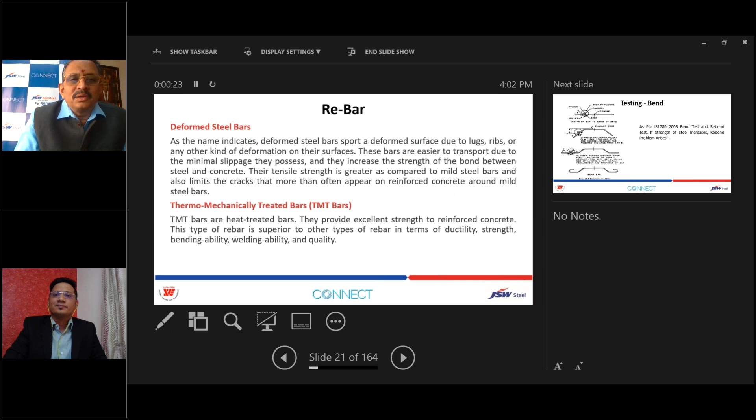Good afternoon, and thank you Omkar for the good words about my introduction. It's my privilege today to share some knowledge and thoughts about this very good topic selected for the audience, particularly the engineers and practicing engineers. It has been in my mind—there are many questions for me also regarding the use of higher grade rebars, which we have been using and trying to find solutions for. So today I'm going to share whatever solutions we found for the use of higher grade rebars, the issues we are facing, and how in the future this material is going to go higher and higher in grades. Welcome, all participants. I'm very happy to share this presentation today, and I hope it will be useful for you all.

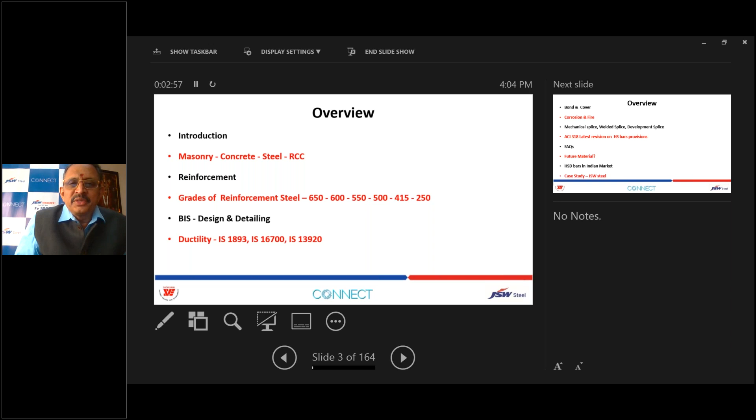So, higher grade rebar, the material of the future, is the topic of today's discussion. My presentation overview: a brief introduction, then masonry, concrete, steel and RCC, and how these have transformed structural systems. Then reinforcement, the primary topic of the day—the rebar or reinforcement steel—and the grades of reinforcement steel, how they have grown starting from 250 about 3-4 decades back. Then Bureau of Indian Standards provisions for design and detailing, how we have to utilize these provisions in our design, and the ductility provisions. Seismic design is now very important for all structures in India, so I'll briefly touch on the ductility provisions of IS 1893, high-rise structures and tall buildings up to 250 meters as per IS 16700, and also ductility detailing as per IS 13920. So these are the topics.

When we talk about higher grade steel, immediate questions pop up in our mind. What about bond for higher grade steel? Will it be okay to use the same M20 grade concrete with higher grade steel, or should we increase the grade of concrete also? Similarly, the cover to reinforcement—will it require a higher cover? These are all questions. How about corrosion when we go for higher grade steel? How about fire resistance? And then the immediate thing when we talk about higher grade is mechanical splices—can we use couplers? Can we do welding for the splice? Can we use the same development length, or should we calculate a different development length? Is there an increasing factor to increase the development length for higher grade steels because of bond considerations?

While preparing for this presentation, I found that the IS 456 provisions, which are currently under revision, do not adequately cover higher grade reinforcement—whether in special publications SP24 or SP34 detailing provisions. All this needs definite upgradation. So I found that ACI 318's latest revision, 2019, has adequate provisions covering all the HS bars detailing and design provisions. So we must all, as engineers, refer to this ACI, and also ASTM for testing.

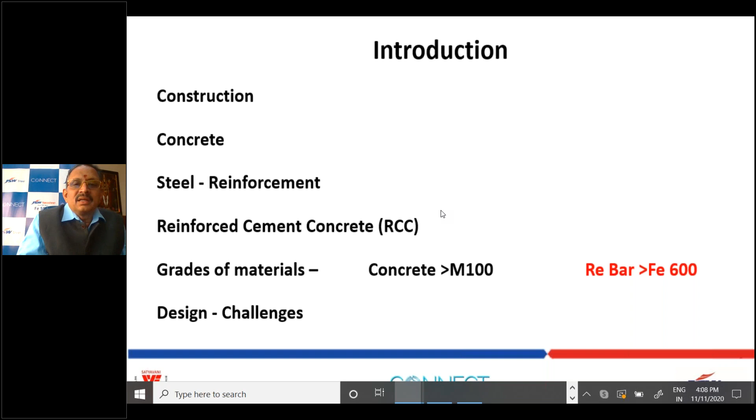In construction, the role of reinforced concrete and steel reinforcement plays a very great role. In this pandemic and lockdown period, we are seeing a lot of lectures on concrete, as everybody thinks concrete is a complex material. I have given many lectures on concrete, precast and steel on pre-engineered buildings, but reinforcement as a material, as a specialized talk, this is the first time I'm talking about it. To my surprise, I found there is a lot we have to cover, so please stay aligned with me to get this information I'll be sharing today.

Reinforced cement concrete is the most versatile material for structural elements, spread uniformly worldwide with the widest applications. Concrete itself is the second most used material after water, but concrete cannot go alone, it needs reinforcement. Today we are seeing the grade of concrete going above M100, and the grade of steel going above 600. We have to be abreast with information about codal provisions, design and detailing provisions, and the challenges in design, construction and quality control. This is the brief introduction to our topic today.

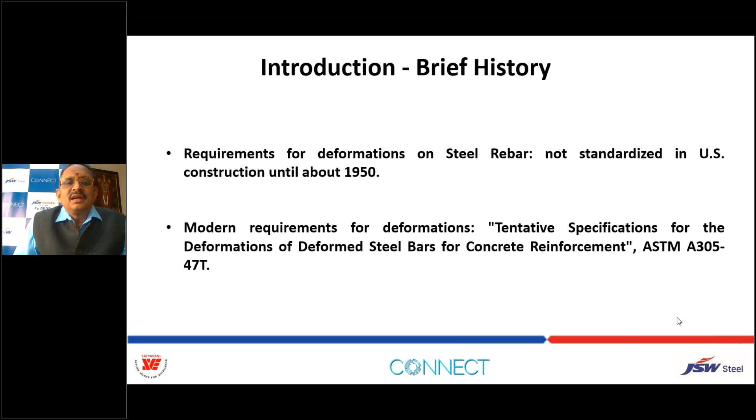The requirement of deformations on steel rebar - reinforcement bars in masonry construction were first used about 600 years back, so we can all feel confident that the concept of reinforcement per se is time tested.

During the 18th century, rebar was used to form the carcass of the Leaning Tower of Nevyansk in Russia. The cast iron used for the rebar was of high quality, and there is no corrosion on the bars till date, meaning more than 200 years. Europe and North America developed proper reinforced concrete in the 1850s, and the longest standing reinforced cement concrete high-rise building is about 113 years old now. So around the mid-19th century, rebars were used in producing modern reinforced concrete.

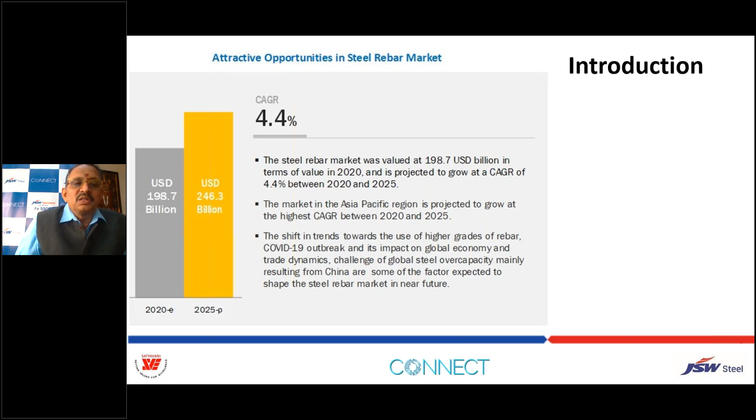The business of reinforcement is about $250 billion, projected by 2025. Now it is about $200 billion, and out of this 246 billion, the Asia Pacific consumes the maximum reinforcement, doing the maximum business. We are all in the Asian region and Indian subcontinent, one of the fastest growing regions, and it is very important for all of us to be clear about the grades and quality of this material and how we use it.

Structures started with masonry, structures we see that are 2,000 to 5,000 years old. Then came concrete, then reinforced masonry, then steel structures. Today reinforced concrete has become very common, used everywhere in rural, urban, developed and underdeveloped areas. Next is pre-stress, which has gone beyond reinforcement, and composite materials. Now we are talking about high-grade materials, upgrading reinforced cement concrete.

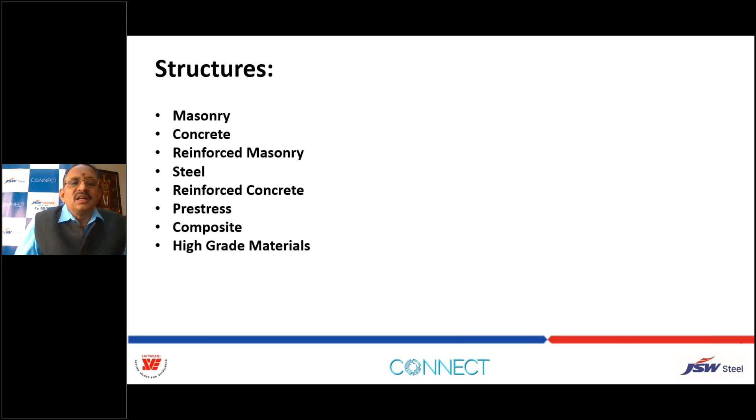Earlier we were only using M15 grade concrete and Fe415 for almost 2-3 decades. Now is the time to upgrade our materials and our design data with these higher grade materials. Let us refresh our thoughts on this reinforcing material: concrete is weak in tension and has to be reinforced properly with suitable material. The purpose of providing reinforcement is to take up all tensile stresses, increase the strength of concrete sections, and prevent the propagation of cracks developed due to temperature and shrinkage.

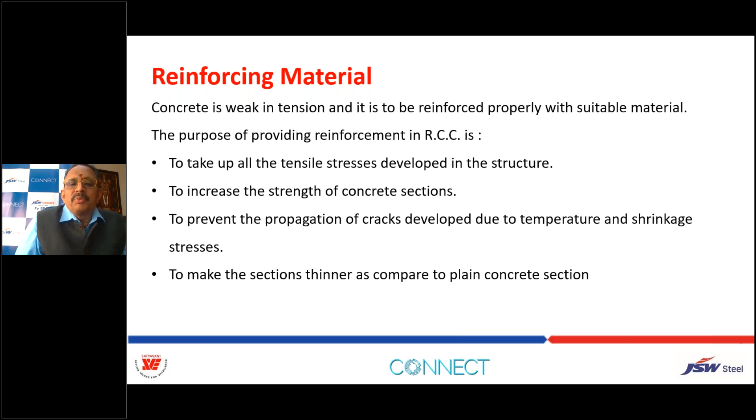So we provide the reinforcement not only for the tensile stress, but also to restrict the crack propagation due to temperature and shrinkage stresses, and to make the sections thinner as compared to plain concrete sections. So these are all the reasons for reinforcing, and criteria is it should be having perfect bond with the concrete.

That is the most important thing, as we all know. Steel reinforcement should develop the bond, otherwise, because these two are different materials, we can't utilize the tensile capacity of the steel without this bond capacity. So that is one of the most important criteria.

And next is it should be of high tensile strength, because we are trying to compensate the weakness of concrete in tension. And cost should be reasonable, because many people ask me, students particularly, why not aluminum, why not other metals which also have higher tensile capacity, even the carbon fiber. So the reasonable cost is the basis for steel being an optimum material satisfying all these requirements.

The next most important point is coefficient of thermal expansion, which is reasonably in tune with that of concrete, because when there is a temperature change, if these two materials have different coefficients, then it loses its bond connection. So it should be workable.

Next most important thing, we should be able to cut it, bend it, and join it, because we should be able to fabricate. Concrete has become so popular only because of its flexibility. Same way rebar with steel also has become popular only because of its ease in cutting, bending, and joining. We are trying to further improve this as we move forward. We'll discuss all those points.

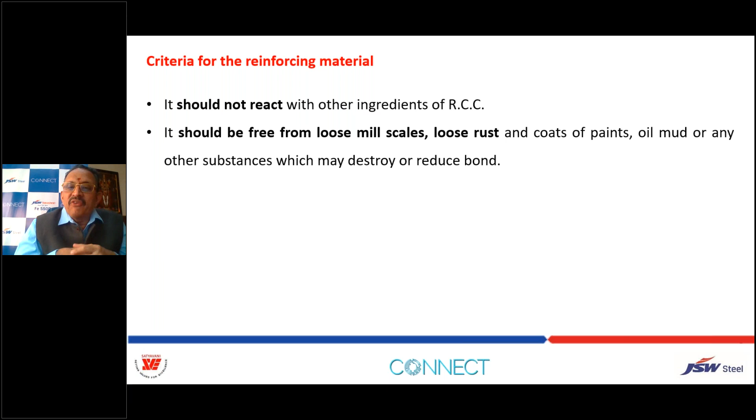And it should not react with other ingredients of concrete. That is mainly the corrosion. Either it should not affect the concrete, or it should not be affected by the concrete. It should be free from loose mill scales, loose rust that forms during manufacturing. So that is one of the important criteria.

So that's how we have got this steel reinforcement or rebar, or Tor steel, or Tarkari and HSD bars today. Tarkari was a brand which I used in 1990, which had come up with 550 grade those days itself. And I can't forget it, because I also want to share that experience with you, because many people at the time I completed my design and drawing with Fe 415.

And then my client came up with this Tarkari saying that it is having very high strength, almost 30% more strength compared to what I had already designed. So please modify the drawing. It was such a huge work, and you know, structural engineers are paid very paltry fee.

And I thought that I must do it efficiently. So what I did is I applied a 1.3 factor and reduced the steel reinforcement. In the process, I ignored certain detailing criteria and minimum percentage of steel criteria and issued the drawing. And also, almost, construction started.

And so what I'm trying to say is, please don't use such methods. We have to inform the client, when you are saving the cost, you compensate us for the extra work also. So use of higher grade materials, if we have to do, convert the drawings, convert the designs, we have to spend again right from the scratch. That's what from the design table and detailing table.

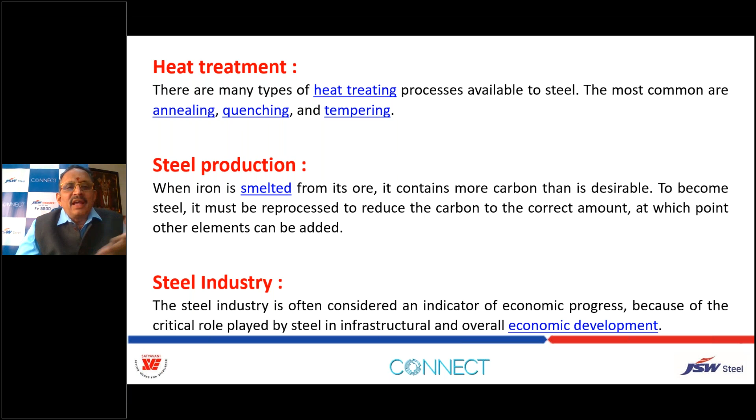And higher grade helps us in saving costs very drastically.

So suitability of steel as reinforcement: we all know steel is very strong in compression, of course with buckling and proper ties, and tension is another capacity. Almost we utilize 87% of its strength as per our design, for shear and torsion too. Concrete develops very good bond with steel, and steel is ductile. That's very important because it never fails suddenly. Steel gives us time to understand the yielding, and we can save lives if it reaches that point. More elongation of steel before failure helps us, that's why we insist on percentage elongation of steel.

Steel bars can be cut, lifted, and welded easily with commonly available tools and hand machines. It has longer life if provided corrosion protection, or we use corrosion resistant steel. It's easily available because in the last 20 years, steel production in India has grown threefold with companies like Jindal, Tata, and others, which was otherwise mainly a public sector. So India has grown from 30 million tons of production capacity in 2000 to 90 million tons. That's a very fast growth.

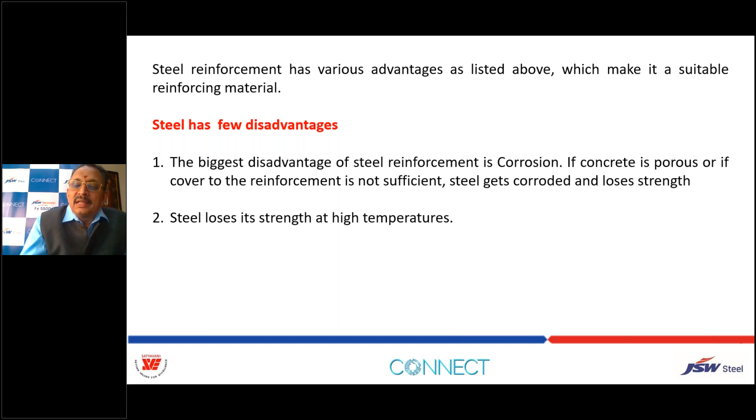We still have to grow much further because we all know housing and office space shortages, and it's going to transform a lot as we move forward. But steel also has two things we have to take care of: corrosion and temperature, that is fire resistance. These two are very important. In fact, I have seen a fire accident in one building where the whole steel is exposed, meaning the whole cover portion has fallen. So adequate cover for fire resistance is very important to protect the steel, particularly when we use high grade steel reinforcement. We have to take care of this, and as we move forward, I'll explain how we can improve the temperature resistance.

Rebar types: we have come across mild steel, and properties where 7850 kg per cubic meter is what we take as unit weight, but it can range between 7750 to 8050. This is the main property. We also have deformed steel bars, TMT bars, which is very popular today, thermomechanically treated bars. We also have high strength deformed bars, that is the actual technical term as per the code.

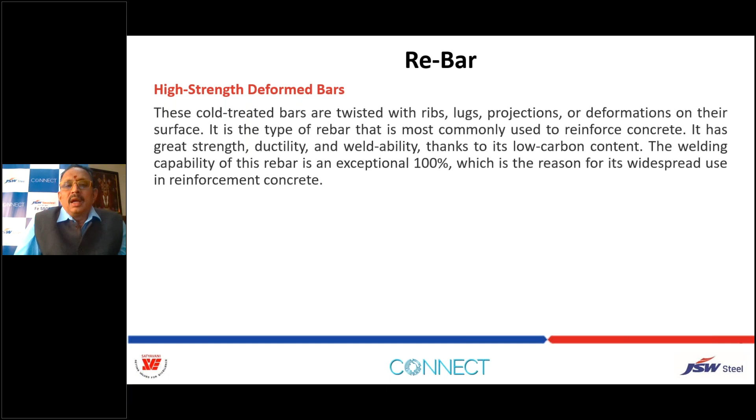Just for academic interest, I'm sharing this—not directly relevant to today, but since we are talking about corrosion, we need to think about this, and also the need and practice of preheating, which is required for weldability, which I'll share more in detail as we move forward.

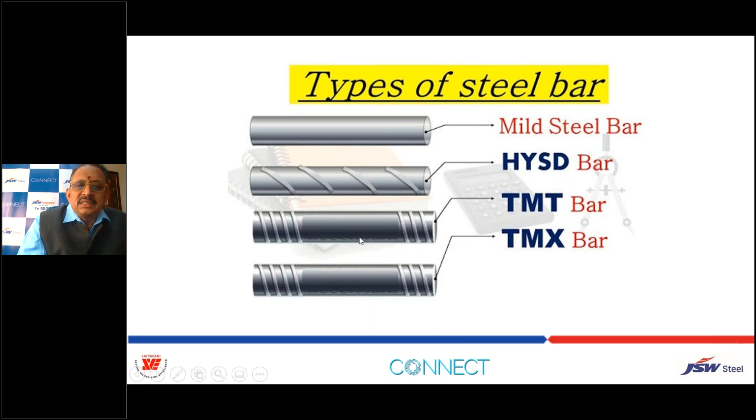Now the types of steel bars: as we all know, HYSD bars used to be twisted, and we used to have ribs like this. Now we have TMT and TMX reinforcement bars, which look like this. This is the rebar that we normally look at. There is a specification for the radius of this junction and the rib size for proper and adequate bond, which we'll be discussing. So these are all the rebars.

Then we use the rebar not in isolation, we all know. There will always be a joint for the rebar, or we'll be using it as a mesh, or in the bent condition. So what are the issues, why should we talk about higher grade at all? What are the issues in the current rebar that we are using, whether it is Fe415 or Fe500?

Let us just refresh again. We all know, as per SP34, we do the detailing—how to place the reinforcement, what is the spacing, what is the diameter, what is the minimum and maximum spacing, and what is the minimum and maximum steel percentage. We have all these provisions covered in IS 456, and also detailing requirements like development length, position of splices, and bent bars, and how to bend these bars, all defined in SP34. I'm not going into detail, just refreshing on these ideas.

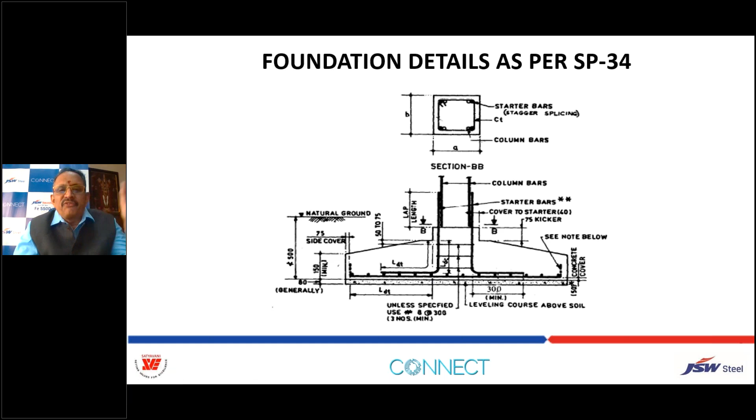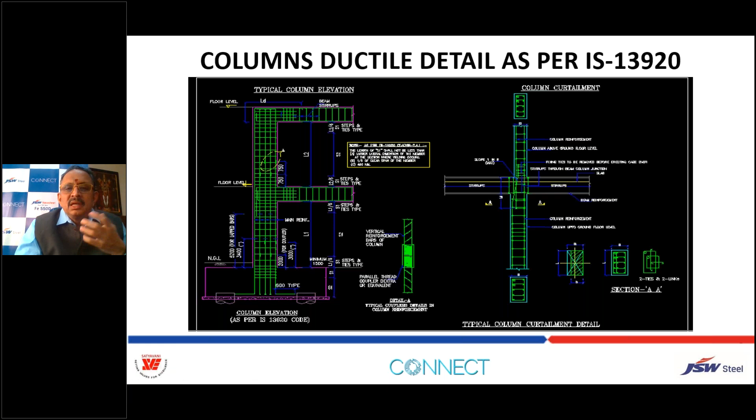We have ductile detailing as per IS 13920 for earthquake resistance, and we use couplers in higher diameter bars. So mechanical couplers, and sometimes we are forced to go for welding, and what kind of precautions we have to take for welding, all this point.

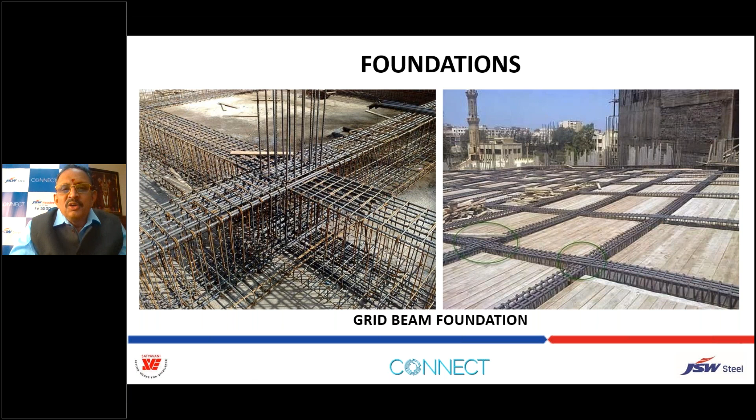This kind of design, where we are asked to minimize beam depth, minimize beam width, or minimize column size to increase carpet area, causes a lot of problems at junctions, beam-to-beam and beam-to-column. We keep seeing these problems, and how to maintain the cover of the column and the cover of the beam, all these issues. You can see this is the height of congestion, how concrete can go into this kind of joint.

So it's very essential for us to think of reducing the steel, while the owner will not allow us to increase the size of the column. If you increase the column size, you can comfortably design with 1% steel. If we design with 4% steel, this is the situation, with 1% beam reinforcement that kind of thing. My guru also told me never go beyond 0.5% for the beam and beyond 2% for the column. Though the code permits it, it should only be utilized in extraordinary circumstances.

So you have the constraint of member size and percentage of reinforcement. So how do you solve this? The only solution is a higher grade of material.

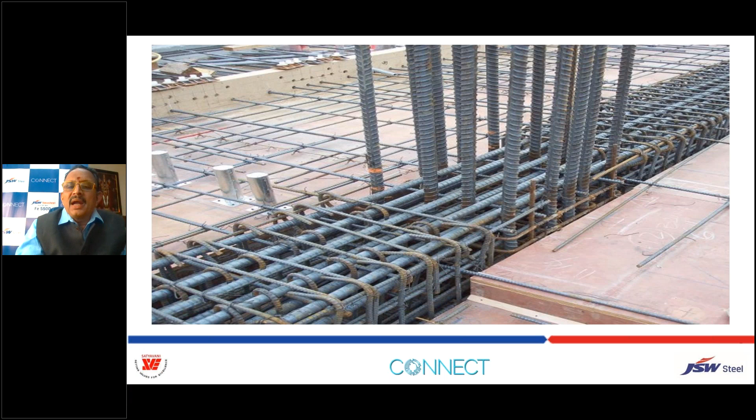These are all pictures, just showing some project pictures where there is reinforcement congestion. Here also you can see how the steel affects concrete placement. You might use flow mix, and 12 mm aggregate only, but still it's a challenge to concrete, vibrate, or compact in this kind of situation. This is the slab reinforcement, not a very big challenge, but definitely lesser reinforcement will help us in proper concreting and proper compaction.

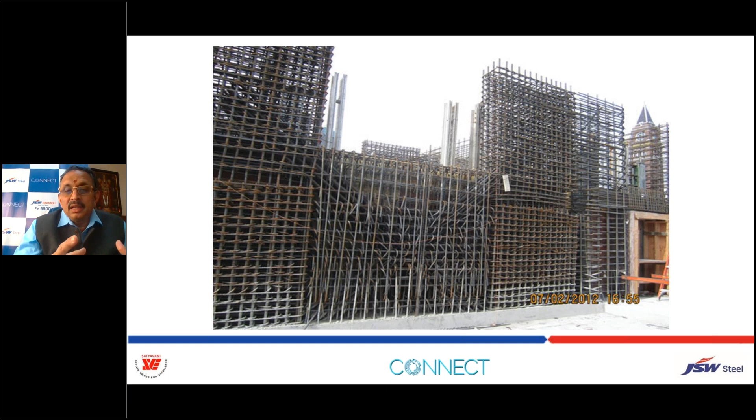So these are all reinforcement photographs, and we have lift shafts and mainly shear walls nowadays, what we are using for high-rise buildings. This is where the provisions of IS 16700 apply, and the wall thickness is mainly controlled by space requirements and carpet area requirements. So it's very useful to go for higher grade of reinforcement in this kind of situation. These are all box culverts; I'm using some examples like ramps where we use this reinforcement.

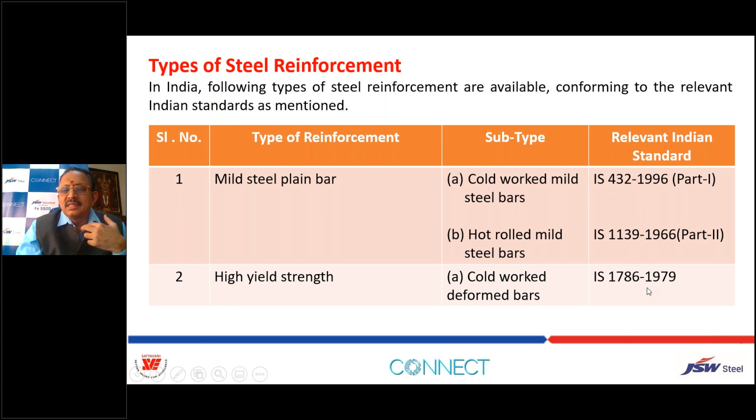And types of rebars: we all know mild steel has almost gone out of usage, except in structural steel where we use it for tie bars and such. Otherwise, HYSD, now under IS 1786:2008, and deformed bars have become order of the day. We are using high strength deformed bars. Now we have FE500, and it's going to FE550 also.

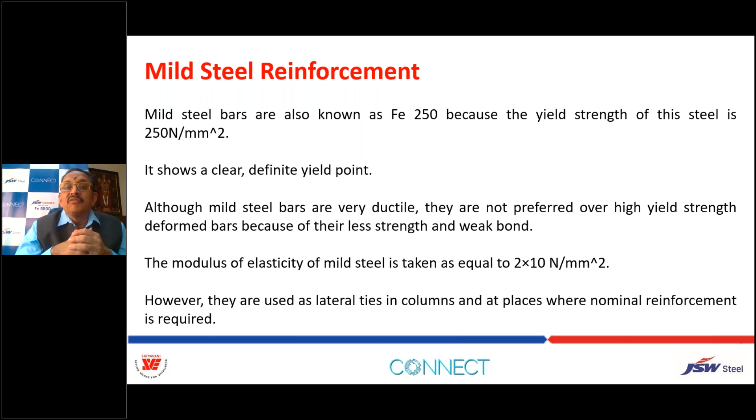And TMT bars and corrosion resistant CRS steel, that is low carbon, have become very common materials. Fe 250, which we used to use for stirrups 30 years back, we stopped using almost 20 years ago. But mild steel is good for bending and can be used where spacing governs. I clarified in the FAQs whether we can use a combination of HYSD and mild steel - no, you cannot use two different grades of steel as per code within the same main reinforcement. So we have to keep that in mind while designing.

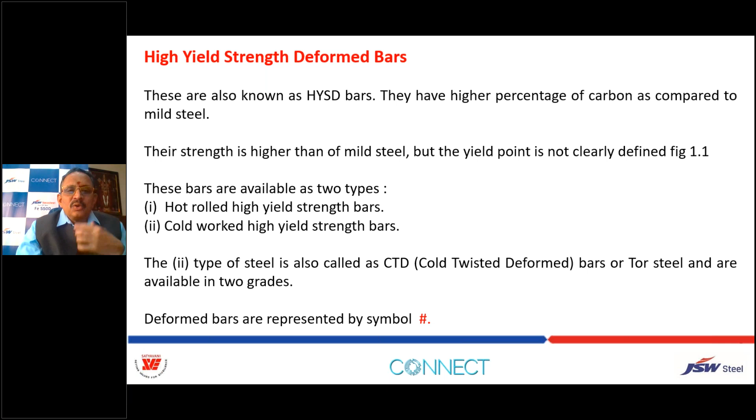Stress strain curves, right from our college days we are used to seeing this. High strength deformed bars had certain defects, cold twisting and so on, CTD bars. That's why we came up with improvements to this process - high strength deformed bars, or TMT bars, or Thermex, now the final high grade high strength deformed bars.

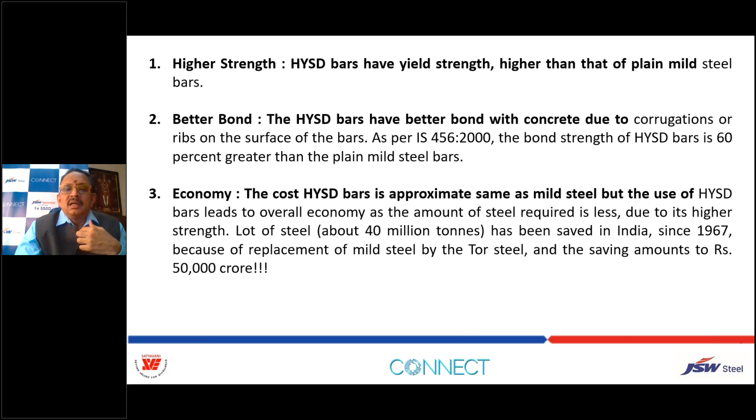HYSD bars had a lot of advantage over mild steel, because in mild steel we had the major problems of bond and development length. With HYSD bars, with the rib in the surface, we could improve the bond capacity by almost 60%. Now TMT bars have further improved, because in HYSD we had the problem of surface cracks. With this TMT method, we get much better quality with high yield strength, better weldability, and ductility - that's most important - and superior corrosion resistance. So these are all the important things.

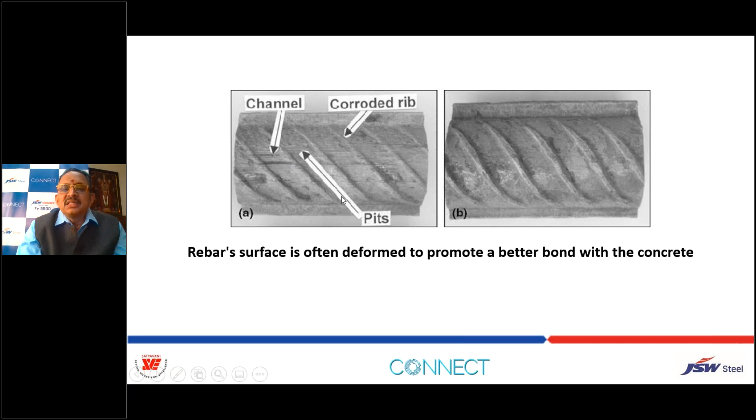We can see the rebar surface deformed to allow corrosion limited to the rib, and the channels are there, and these ribs also will help us for bond resistance. These pits for corrosion, we have to be very careful about measuring the corrosion resistance, and it will give the better bond. These deformed bars have ASTM standards.

The latest is ASTM A706 and 615, so higher grade reinforcement we can use. The physical characteristics of these rebars, we must check for thermal expansion coefficient for concrete and steel, which has to be same. And bendability - this is a very important aspect, because the anchorage we can get only with the bendability.

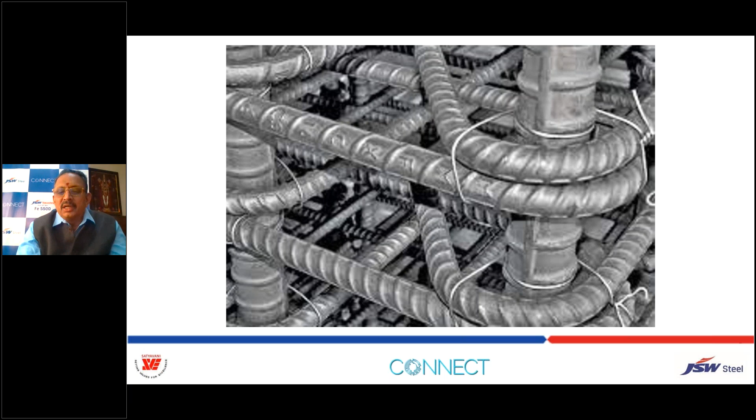So rebar has ribs that bind it mechanically to the concrete. The ribs develop this mechanical bond resistance - it's not only by the chemical bond stress - and it can still be pulled out of concrete under high stresses. So to prevent such failure, there should be embedded enough concrete and anchorage provided to the reinforcement. Common rebar is made of unfinished tempered steel, making it susceptible to rusting.

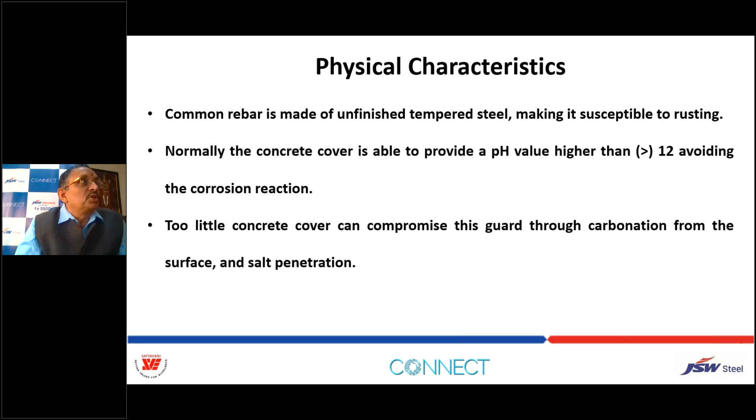That's why concrete cover with a pH value, normally 11 and it can be greater than 12 also, avoids the corrosion reaction. So too little concrete cover can compromise this guard through carbonation. Adequate cover as per the IS 456 provisions for durability criteria we have to maintain. Too much concrete cover also is bad actually, because the crack widths will increase with the cover beyond 50 mm. So we have to strictly follow the provisions of IS 456, the durability criteria.

It's not just enough to design with the adequate cover and leave it. We should also check the performance of this concrete with the tests on carbonation and sulfate resistance. That is all to protect the steel reinforcement.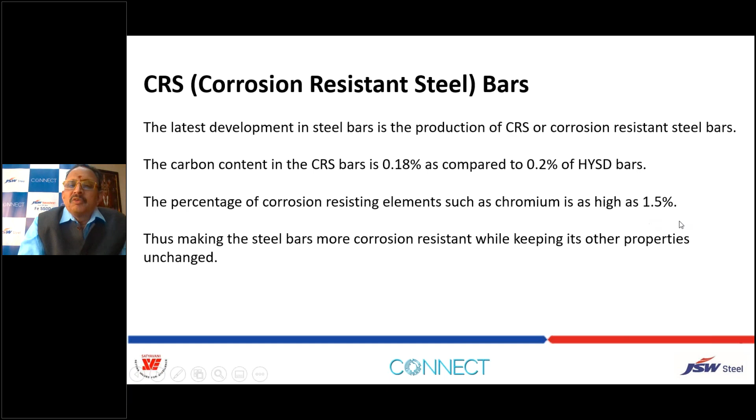And then we have this proof stress of 0.2%, and yield stress of 0.2% of proof stress. And characteristic strength - we all know concrete characteristic strength, likewise we should have the steel characteristic strength also. The tests as per the code we have to conduct for maintaining quality. Normally I have not come across major problems in the steel characteristic strength unless it is a very bad manufacturer. All reputed manufacturers give good strength. In my experience, I didn't come across bad steel so far. Only the brand we have to ensure.

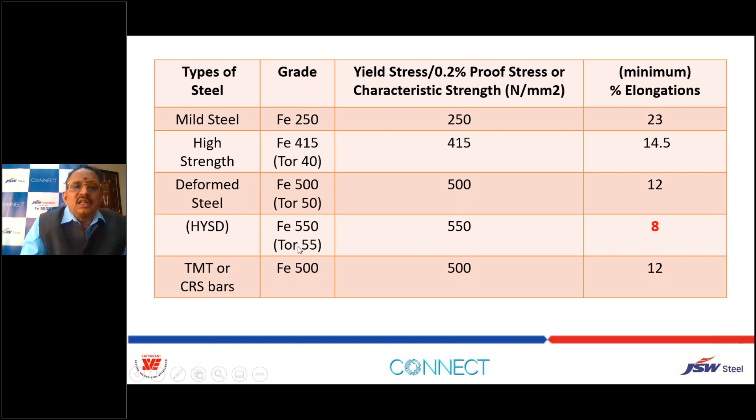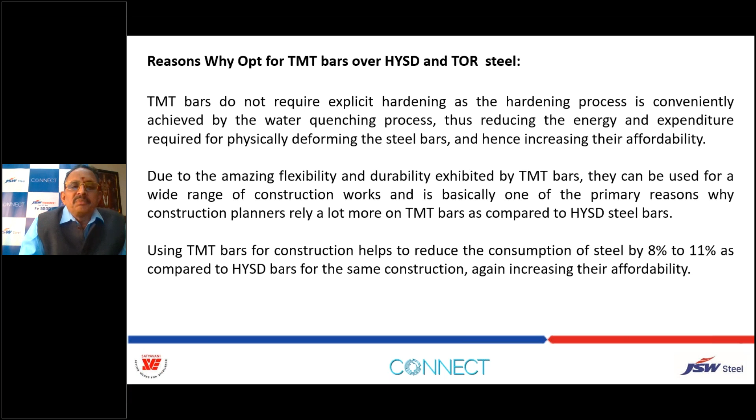So comparing TMT bars over HYSD bars: we have surface defects in HYSD, which are eliminated by using TMT bars. A lot of flexibility and durability is found in TMT as compared to HYSD. And reduced consumption of steel, by about 8 to 10-11%, because of its higher strength.

TMT means I'm talking about FE 500, as against 415 which was there before. And now with HYSD bars, we are talking about 550 and 550D. This is the chemical composition - we are all aware, if it is just 550, it is 0.3 carbon content. If it is 550D, carbon content is reduced to improve the ductility. The sulfur and phosphorus are also reduced to increase fire resistance and overall ductility.

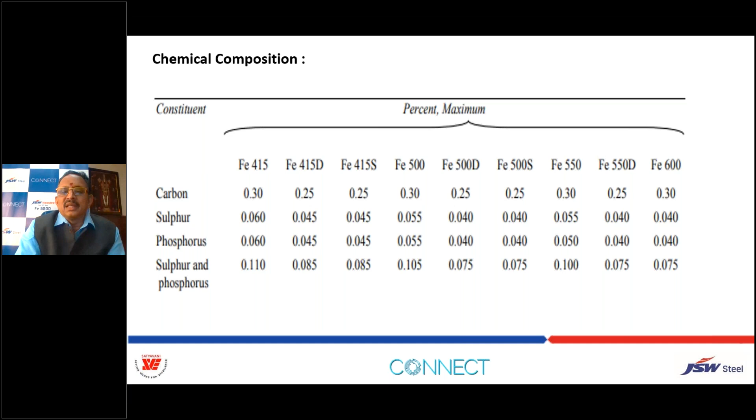So these are all the guidance as per the IS provisions. Now let us talk about high strength deformed bars, ranging beyond 500 - now we are talking about 550. In India, we also have the possibility of procuring 600 or 650, customized. We can procure if a particular project requires this kind of high strength. There are provisions, as I said, in ACI. The provisions required for high strength rebars in the codal provisions - amendments are required for IS 456. As I said, it requires improvements in the bond and bendability of these high strength bars.

We must check the bond capacity and the bendability. Cover provisions, do we require any modification in the cover? And what about the corrosion of these high strength bars?

Because when we utilize such high strength, the diameter to be maintained as per the design is very important, and corrosion, we all know the effective diameter is going to reduce with corrosion. And ductility provisions, even if we use high strength bars, ductility is very important for this seismic resistance.

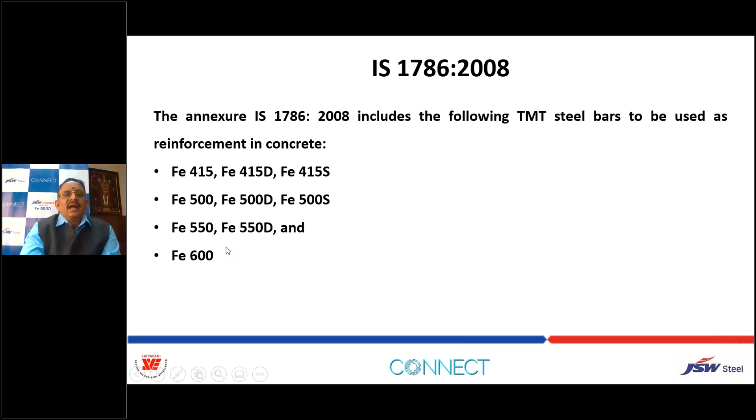And the crack width calculations we have to do when we are using this higher grade reinforcement because of the higher stresses. Though we are increasing the strength of the steel, the concrete we might be using M25 or M20 or highest M40, M50 also. So it's always good to check the crack width as per our tensile stress in the rebars.

And design aids, I have come across, in fact, when I asked my team, what is the disadvantage of using 550? They said we don't have this modification factor for the deflection check in the IS 456 modification factor.

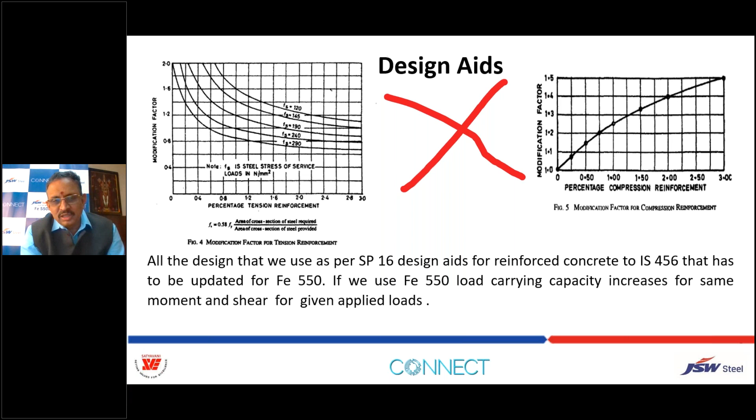So I always say that please don't use this modification factor unless you calculate, don't use the L by D ratio. You calculate the elastic deflection and calculate the long-term deflection, and then use this percentage for modification factor and try to give adequate provision for this modification factor instead of bothering about this modification factor.

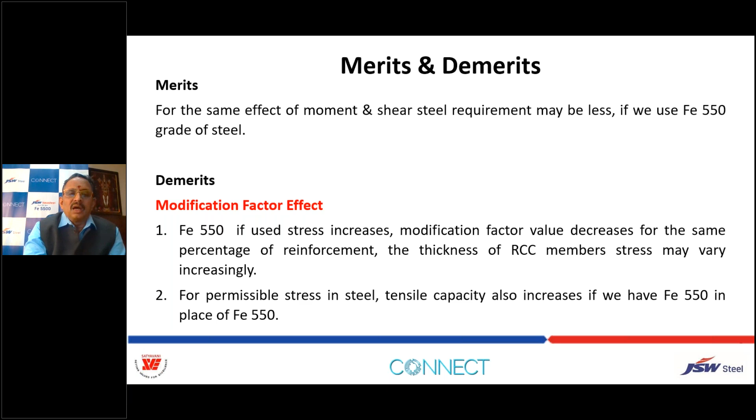And then stress strain curve for these high yield strength bars and HYSD bars, IS 456 has given up to 500. And modification factor effect it will have on the stresses as well as the deflection criteria. So we all have to take care while using the high strength bars.

And the mechanical properties, there is a high ratio of tensile strength to yield stress and very high percentage of elongation that is required for ductility, and TMT bars display superior quality actually for all these requirements.

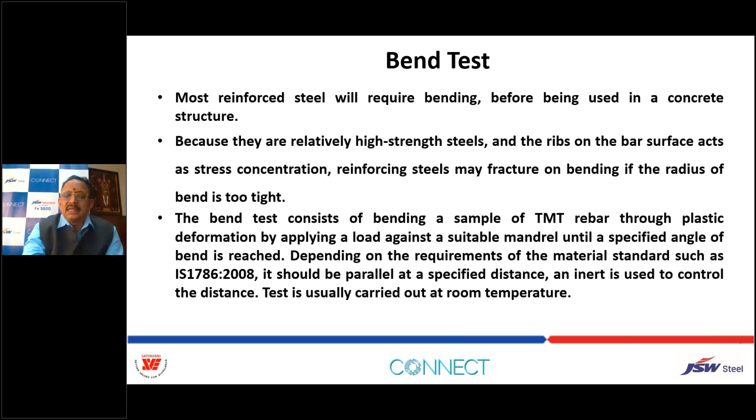And bend test, we have to do the bend test because once we give the drawings and approve the grade of steel, it should not so happen it starts cracking while doing the bending for the fabrication. So it's very important to do the sampling, bending and rebend test as per the Codal provisions. So we have to do all these bends and verify the performance of these bars.

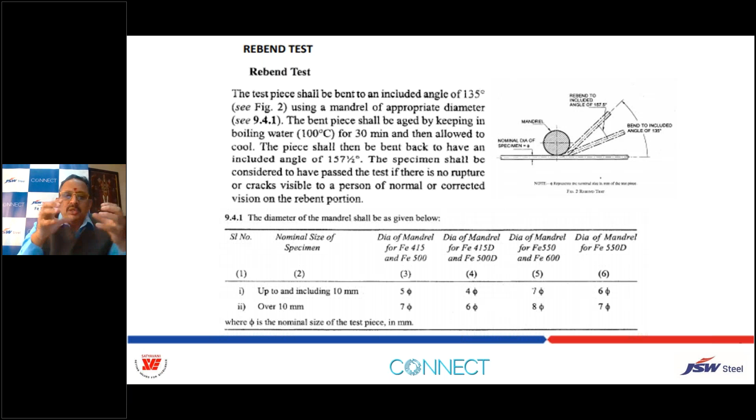And a rebend test, that is, in fact, we actually at the site, we fabricate the reinforcement, assemble it at the site, and at the site we require some change and we do the rebending. So there is a gap between the bending and rebending. So in the test also, it is recommended to give the time lapse between the bend and rebend when we are testing, so that it represents the realistic site condition.

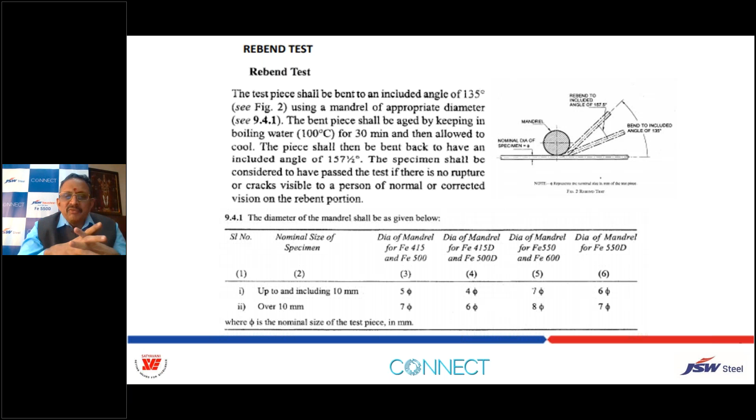And if you are satisfied with the quality of the reinforcement rebar, so we can use it. And ductility is important in the TMT process itself, and low sulfur and phosphorus content improves the ductility also and fire resistance also. And bend radii must not be below the prescribed minimum sizes.

So this is the very important point for bending of the rebar. That means when we detail, we should take care of this. And incorrect bending can severely affect the performance of steel. And be gradual and slow.

That means while bending, there is a rate of bending actually. So we must train the bar benders to follow that gradual bend, because otherwise the steel material will be wasted. They'll break and they will complain on the quality of the steel. And it should be preheated wherever required, and also suitable equipment should be used for this bending.

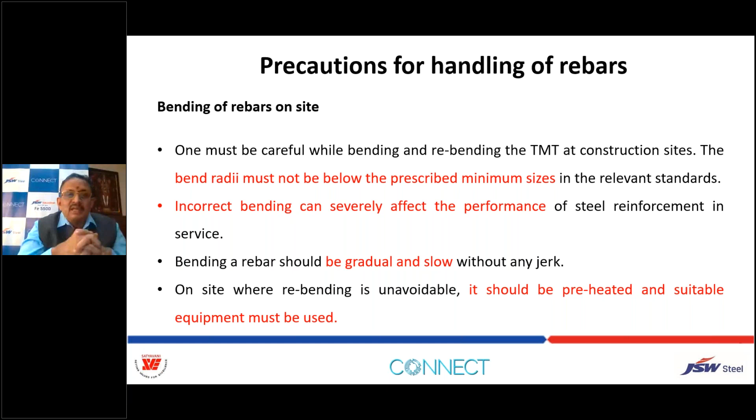And next is the most important. We have to differentiate between rusting, corrosion, and pitting. These three are different characters. So we must understand rusting means it is like atmospheric.

When you are transporting after manufacturing, whatever the residual anion action, active anion that are there will be corrosion, rusting initiation. But that will be superficial. You can clean it and use it. It won't affect the diameter of the bar.

But corrosion, which is deep into this, and pitting—sometimes the depth of the pitting is more than the diameter of the size you see. So it's very important that we observe this pitting corrosion, which occurs randomly and localized on the metal surface. The depth of penetration is much greater than the diameter of the area, so we have to be very careful about this pitting corrosion.

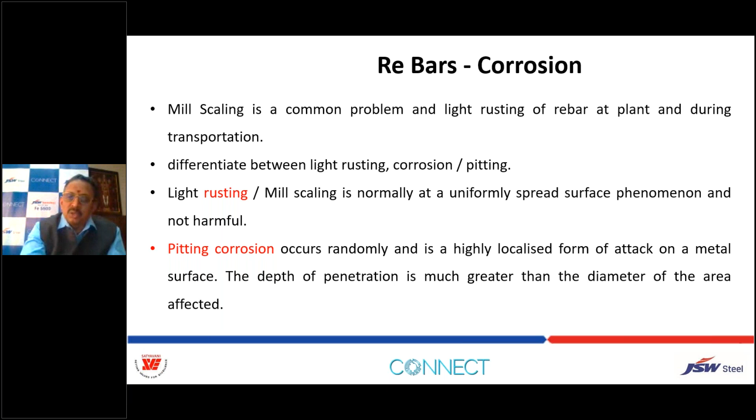And the code provisions, IS 456 and ACI, the mechanical properties are all defined there. I'm just showing these for us to refer to these tables and important provisions.

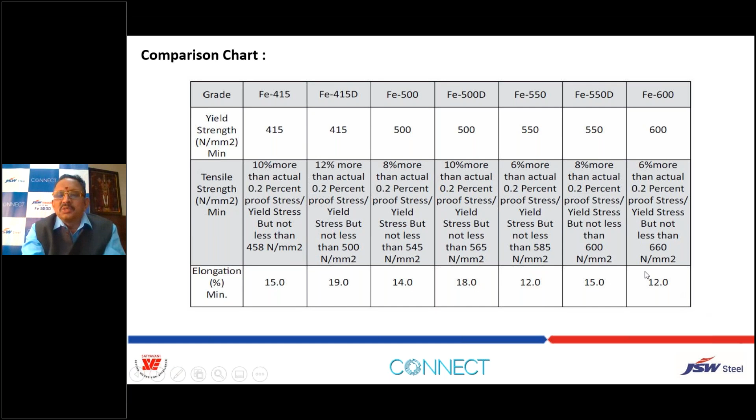It's not my objective to explain all this, but please refer to this for yield strength requirement and percentage elongation requirements. You can see for 550 it is 12 percentage elongation requirement, and 550D it is 15, and 600 it is 12, and 600D it will be 15. So let us check the percentage elongation after testing, and the maximum mandrel diameter for the bend test, which I have shown before also. For even HSD bars, we have to maintain this.

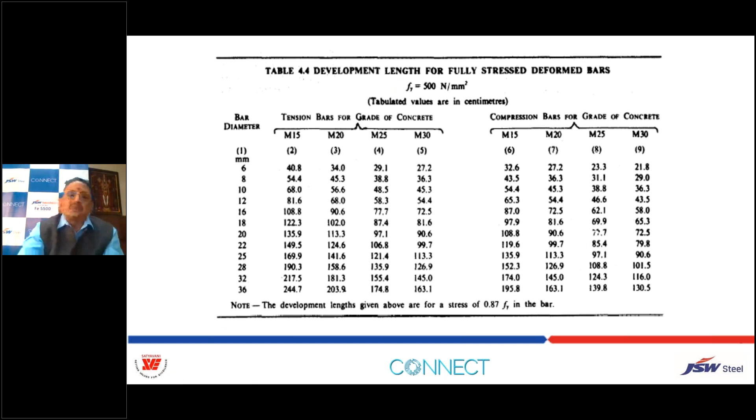Next is the development lengths that are given. You can see for the bars, for MS bars FY 250 and FY 415 they are given, and FY 500 is given, but 550 is not given. So we have to calculate using the formula, and while calculating using the formula, there are certain provisions missing in the present code. That's what I'm going to explain with the ACI.

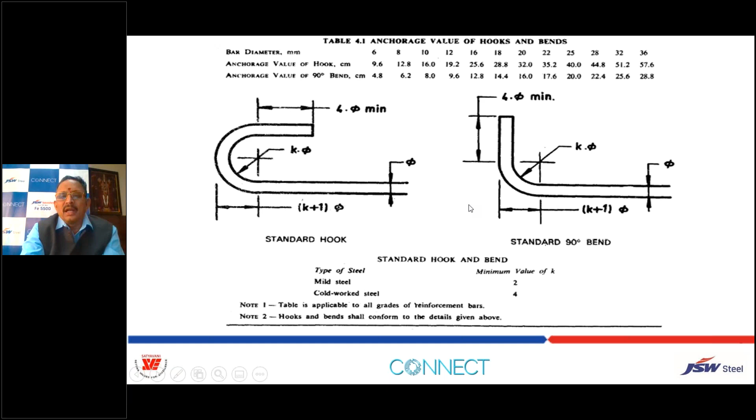So we all know about development lengths, anchorage zones, lap splice and transition zones—we have to keep all this in mind. For MS bars we used to have the standard hook, and with HYSD and HSD bars and TMT, we have end anchorage, hook and bend. These are all the different hooks and bends required to be done. This is very important for maintaining the development length along with the anchorage.

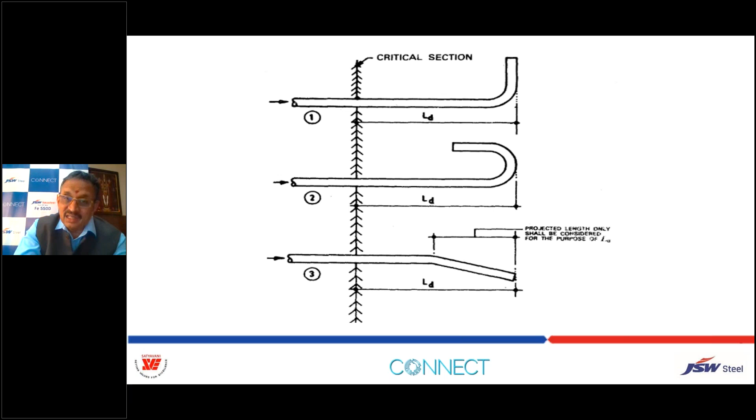In fact, in some of the provisions we have come across, you should not depend more than 50% on the bond—50% you depend on the anchorage only. So it's very good to eliminate the slippages, particularly in fatigue zones. Next is the minimum radius of bends that are given—they have to be maintained for all grades of bars, and it is given only up to 500, and now it requires to be modified beyond this.

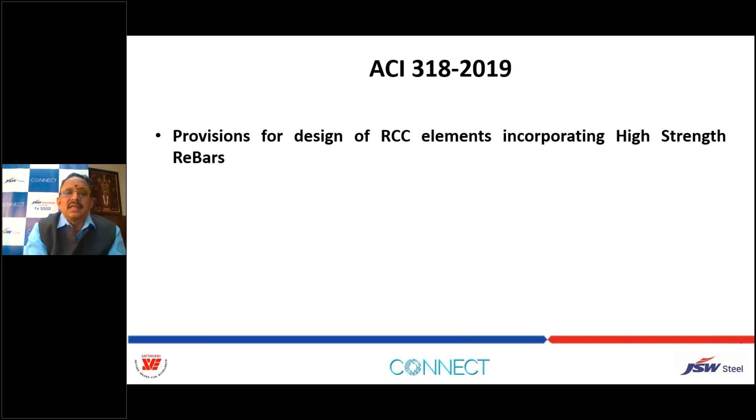That's why I said let us look at the ACI 318-2019. This is the latest code which has incorporated high strength rebars—use of grade 80, that is beyond 600. Grade 80 is based on PSI, 80,000 PSI, so it is equivalent to 600 plus. Then we have reinforcing steel grade 60, which is 60,000 PSI, the commonly used grade in North America at present. And now ACI talks up to 100,000 PSI, which can be up to grade 700.

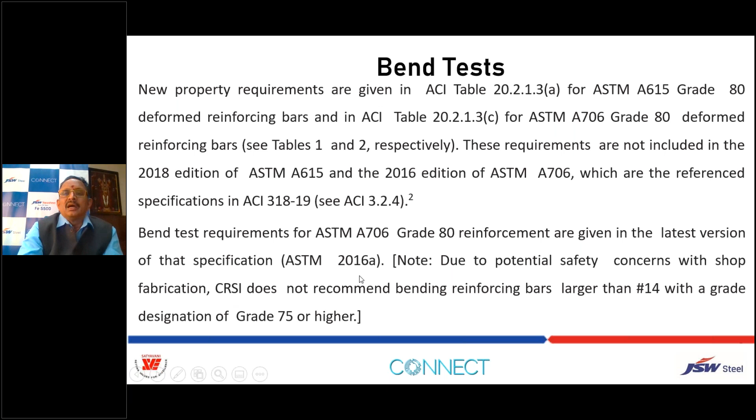So these are the Codal provisions, ACI provisions, which we can adopt using ASTM testing methods, and we can use bend tests also for these higher grades, conducted as per these provisions. It will help us because IS 456 or IS 1786 have limitations—IS 1786 goes up to 600, but IS 456 has limitation up to 500. So until it is revised, we can take support of this ACI: minimum percentage elongation and minimum ratio of actual tensile strength to actual yield strength of 100,000, we can use 1.1.

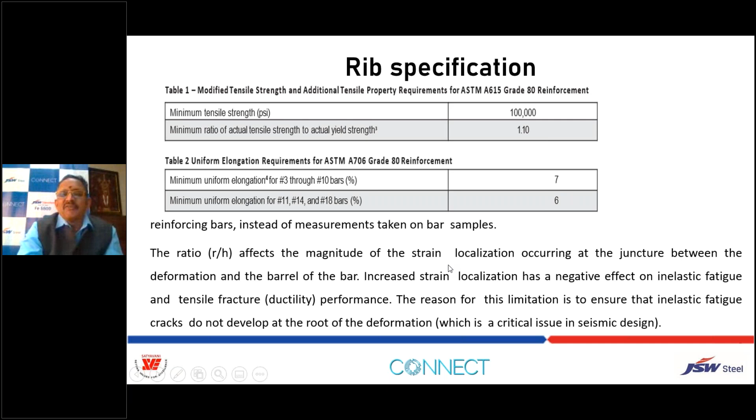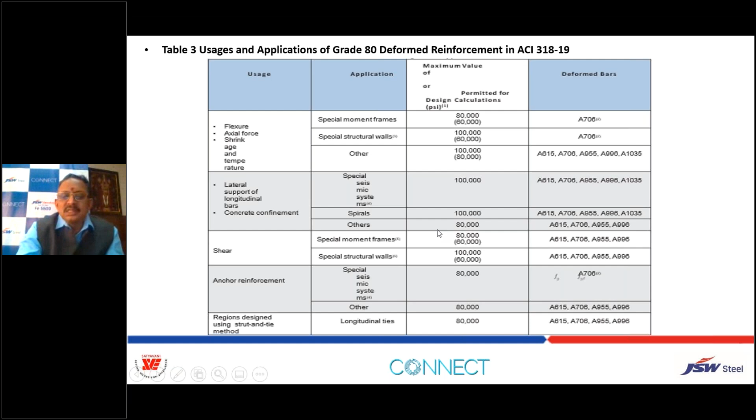So we can use this grade 80 reinforcement bars with proper calculations, modification factors and reduction factors. You can see they are all provided with high strength bars specifications. Please refer to this ACI for development and splice length, mainly the modification factors given here.

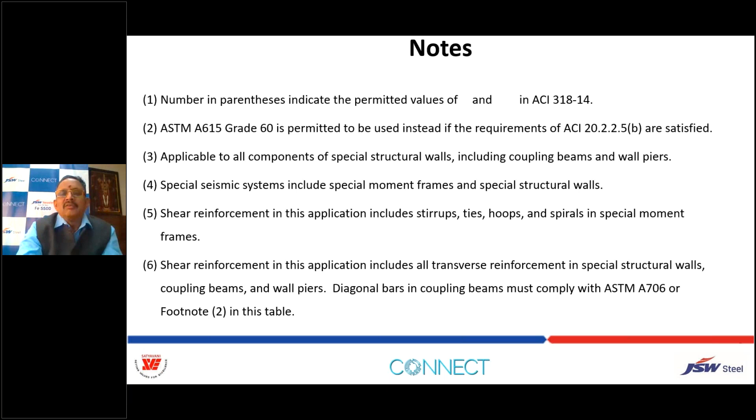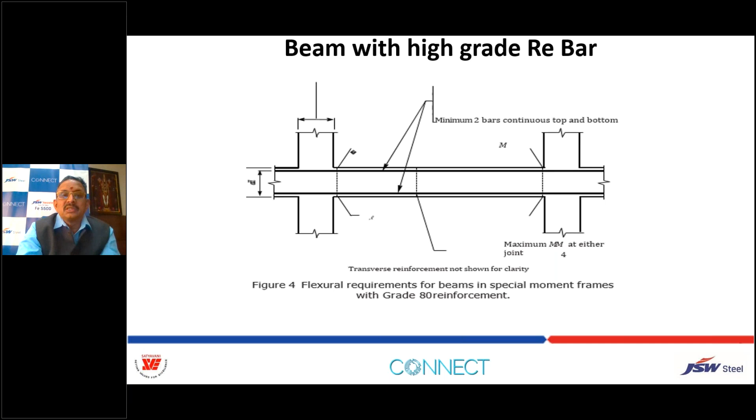You have these modification factors defined in ACI. Please refer to this. And ACI has also given the detailing provisions for the beams and ties, splitting reinforcement.

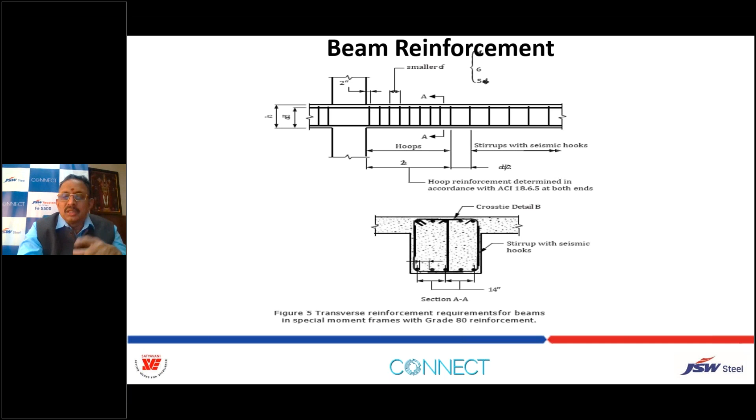Particularly when we use high strength bars, the bursting is also very high, is it not? Because the concrete cover we are not increasing. Cover is only mainly we are providing for the exposure, so you cannot depend on the cover, and it's only the ties. So the ties detailing provision, we have to refer to this for particularly the columns.

The column detailing, when it comes to splitting due to high grade, you have to follow this ties provisions and the spacing of these ties, all that, depending on the diameter of the bar and splice, these anchors, mechanical anchors, all this.

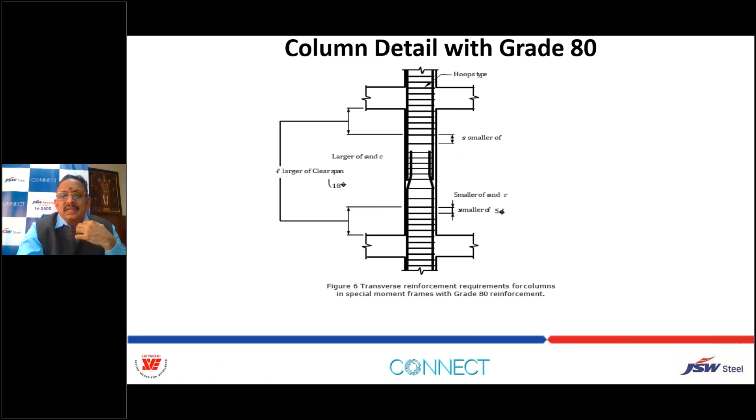So this is the position of the splice, and this we have to follow 13920 anyway for the shear calculation and ductility provisions. And ACI also gives all these provisions for high strength bars. When we use the high strength bar, we have to utilize this.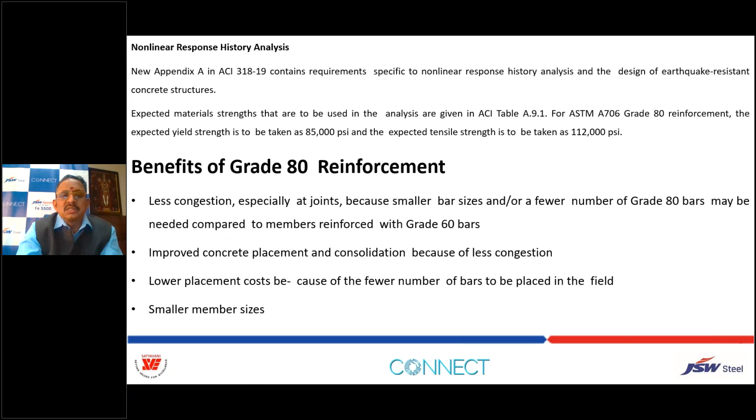And splice for higher strength in joints, and limits on concrete compressive strength and special structural walls, that is shear walls. There are many benefits, like we have improved concrete placement and consolidation because of less congestion, and we have higher space because we can reduce the sizes of the members, and lower placement costs because of the fewer number of bars and smaller member sizes.

So more usable space because of the smaller member sizes, and longitudinal bars combining grade 80 reinforcement and high strength concrete has the greatest impact. In fact, we have done it even 15 years back when we had the limitation on the column size, because the grid is frozen by the client for facilitating parking in the basement. So we had to restrict the column size. There we had to increase the grade of concrete and grade of steel.

So strength reduction factors variation, you can refer to all this. Finally, I'm coming to frequently asked questions. Can rebars be of different grades together? So rebar of primary stress has to be of same grade.

That means the main reinforcement, we have to maintain the same grade. So that means if you are using 550, better use 550. While ties and stirrups can be of lower grade, you can use the ties or stirrups of different grade, doesn't matter, if you want to optimize.

And then can we use splice or development length? Yes, but as I said, please refer to ACI code and recalculate the development length using the reduction factors. Can we weld rebars? Yes, but the welding methods, which I'll explain as we move forward, have to be adopted. Can mechanical couplers be used? Yes, we have mechanical couplers for usage up to HSD 600 even.

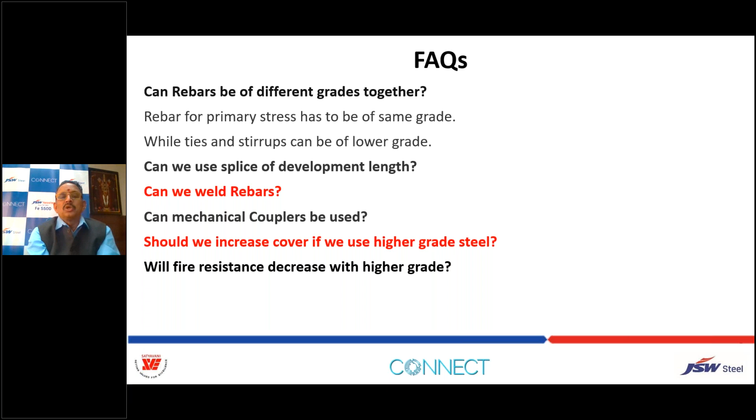No. That's what I said. Fire resistance is governed by the composition, chemical properties of the rebar. So check the phosphorus and sulfur content in the rebar. So this is the, can rebar be welded? As I explained, it is available, and we have to use the structural welding code AWS D1.4.

A low alloy steel bar is weldable. And for welding rebar, we can use the structural connection and we can design this welding. And non-weldable bars, depending on the chemical composition, we have to decide. We should not allow welding.

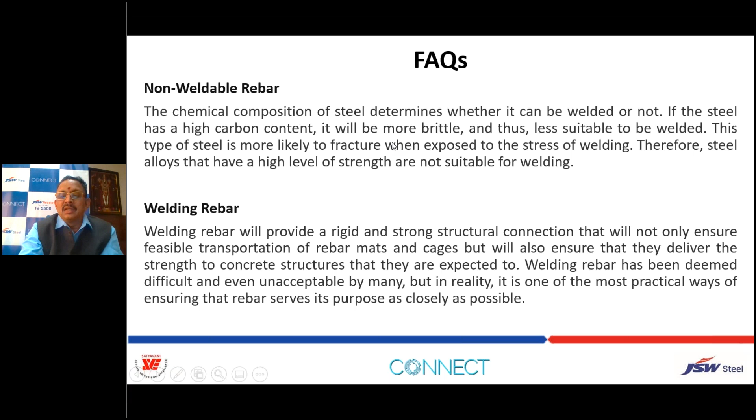And also heating is very important. When we weld, we have to do the preheating sometimes. So we have to use this special welding, shielded metal arc welding, or gas metal arc welding, and all these methods we have to adopt.

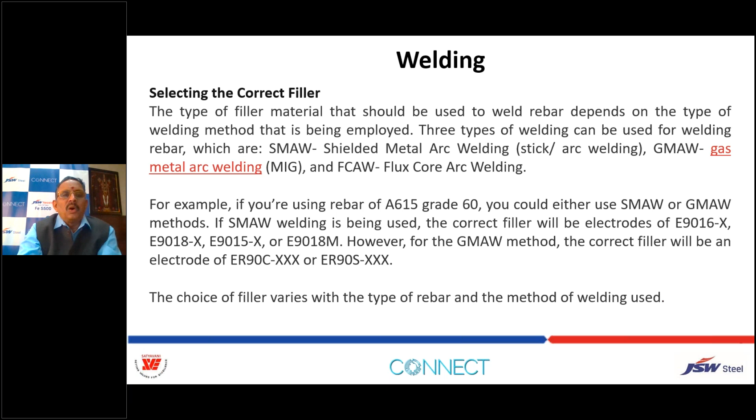And be very careful, please don't allow welding without referring to the proper technical specification and quality tests on the weld, because our whole bond development or the stress transfer depends on this weld. So we have to be very careful while allowing welding. That's why I have given all this information on the welding actually.

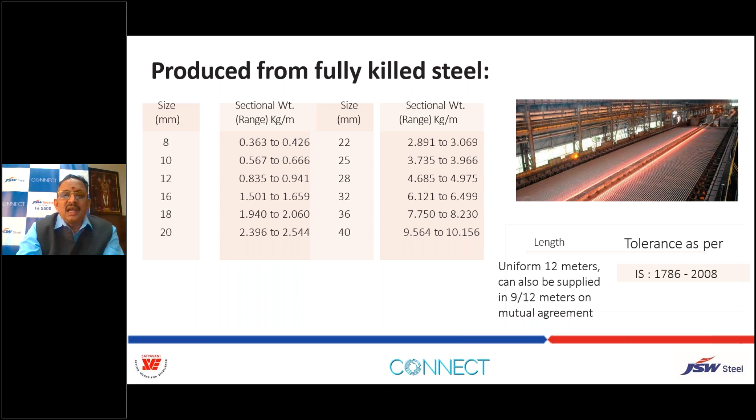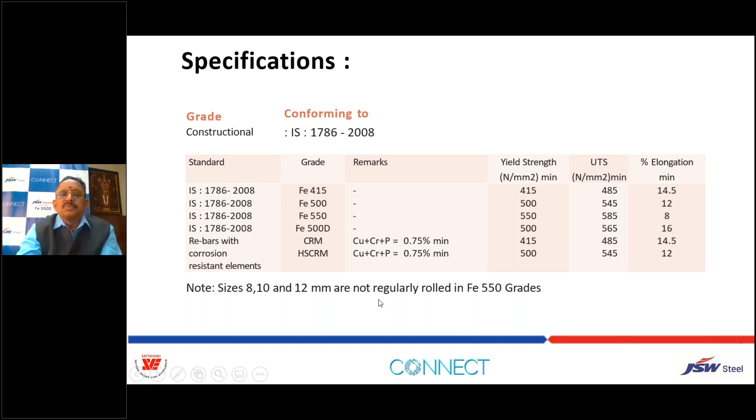So selection of proper weld, preparation of metal, and the correct placement of the weld. It is okay to weld the rebar, but you have to refer to proper technical specifications, and HSD bars in Indian market, they're all produced in Indian market. We don't have to worry, but you have to check the quality as per the standards and follow the quality assurance plan for whatever bar you are specifying, 550 or 500D, corrosion resistance or high strength corrosion resistance. Please specify and verify the quality requirements for these bars. We have fortunately many companies that have the capacity of production beyond 1 million tons per annum, so we can get this steel everywhere in our country at uniform pricing strategies.

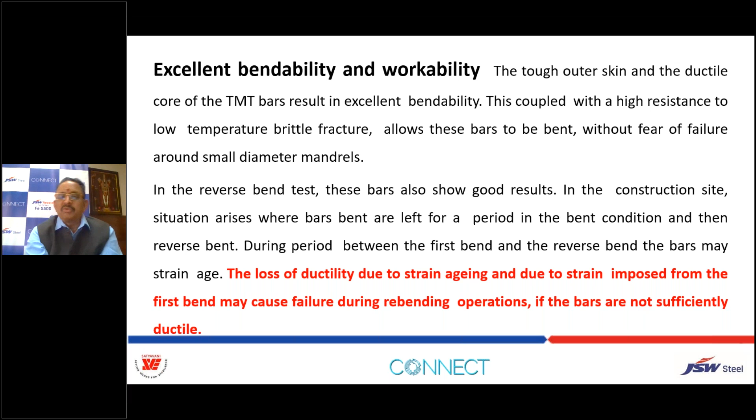Aging is another thing, and superior corrosion resistance of TMT bars, and excellent bendability and workability across the board. They are available, but you can always get the samples of different brands and check the comparative properties. The loss of ductility due to strain aging, and due to strain imposed from the first bend, may cause failure during rebending operations. So we have to check this, bend and rebend tests we have to conduct if they are not sufficiently ductile. This is very important.

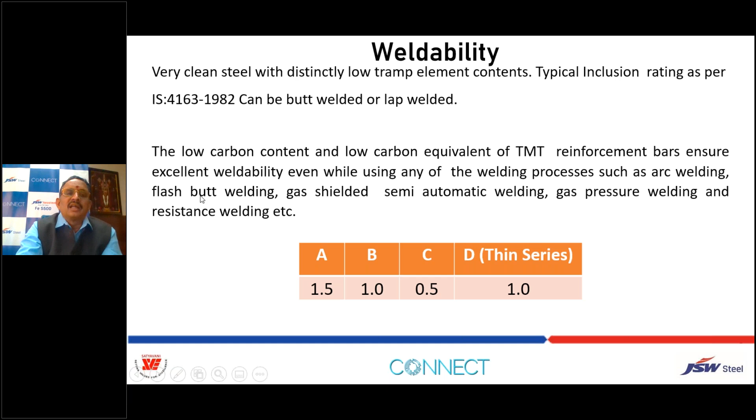TMT bars, they withstand, they have the internal soundness and allied properties, and reduction ratios of bloom size, they should have very high reduction ratios too. You can also ask for intermediate diameters like 18 and 22 - we have after 16, 20, and after 20, 25. If you can get these intermediate sizes, it will help you optimize on the design. So all these diameters and weldability, basically the low carbon content and equivalent TMT reinforcement bars ensure excellent weldability, even while using any welding processes such as arc welding, flash butt welding, and gas shielded welding. So these are all the welding properties.

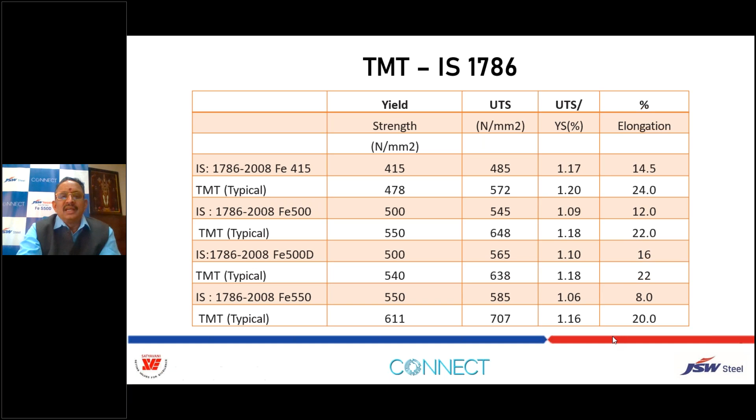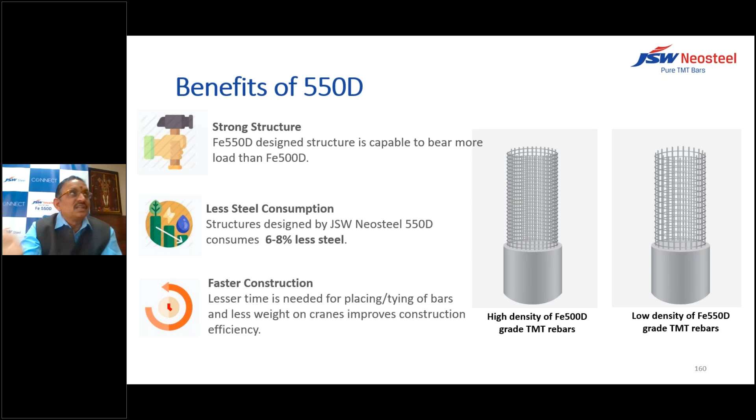So finally, we are here today because of JSW, and let us understand how JSW takes care of this 550D requirement. They have launched this product, NeoSteel JSW, which is also having all the comparable qualities which you can check - this is the JSW brochure which I'm showing. 550D design structure is capable to bear more load than 500D, obviously. And 8% less steel you can do - less steel consumption and faster construction because of the lesser quantity of steel. If you are using 8% less steel, that means in a project where you have 1,000 tons of steel, that means 80 tons less you will be using. So we have to do this value engineering - more space with higher strength, low labor cost, and increased earthquake protection because of the ductility, percentage elongation.

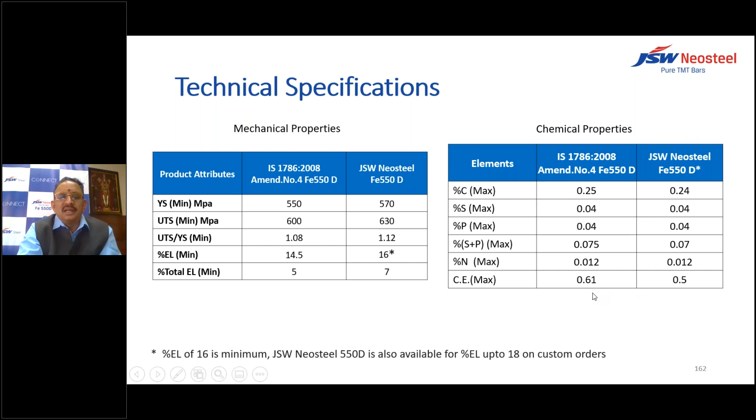So this is the data furnished as per IS 1786 and NeoSteel. You can see 14.5 is the percentage elongation as per 1786, and 16 is what is offered for 550D. And this is the chemical composition - you can see all the characteristics are maintained well within the limits of IS 1786 chemical requirements.

So this is what I wanted to share with you, and I thank JSW for giving me this opportunity to share my thoughts and knowledge on this rebar. To tell you today, this is the first time I'm talking about only rebar. We have been depending on this rebar design and all, but somehow we give so many lectures and attend so many lectures on concrete, but only rebar, very few. So I thank JSW especially for giving me this opportunity to sum up all the information that we use and deploy for use of this rebar.

So any questions you have, somebody can help me picking up these questions. Yes sir, can I send it on your WhatsApp number, the questions? There are lots of questions. You can take selectively 7 or 10 questions and we can answer them. There are a lot of questions that are coming in still.

Thank you, Deepal, for the question on deflection coefficient given multiplied by 0.8 for FE500 - what should it be? Yeah, this is what I said. Vidyadhar Kakotkar's question - the IS 456 needs to be modified for this 550 steel, and probably we can extrapolate from 415 to 500, and 500 to 550. Similar extrapolation can be done for swing and sway in high-rise buildings, and what precautions need to be taken when installing subsequent finishes.